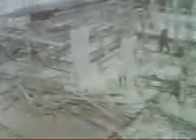approximately a few centimeters below, centering and form material lying around, one slab ready for pouring and being given final touch for the purpose of pouring. Concrete mobile pump taking position by adjusting the pump boom.

And its own body to cover the maximum area of the proposed pours without shifting the station if possible, but not necessary. Rock breaker machine excavating the rock area.

And you can see the site is looking a little untidy because scaffolding material is lying here and there. It should not be like that, but it was like that. And here you can see a pump, crane, some columns, and let's go to the other plate now.

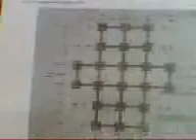It shows foundation level and slab level, just for the purpose of information, how practically it is done. It's just for the purpose of indication. I think it may be useful. Let's see another one. It's a different one, a little cross type. See the various columns on the grids, these various columns and beams and their spacing, 5 meters in general. There's no hard rule for that, but in general, consider that.

And then another one, it's the same but slab level. I have written certain notes, but they were typed in those times. There was no computer actually. It was manually done, so it is not that clear. In those days, I used to do everything manually, and it's all drawn by hand. Nothing was on the computer.

It's an inclined building with the grid, horizontally inclined, but L shape. The same type of methods for the purpose of references, and the slab again. You can see the same slab level. It may not be clear for the purpose of reference, but for the purpose of understanding, it can give an idea how the work is done in the field.

Now let's see another complicated one. You can see it's a little tedious. You see this shape of the building, the corner at one end, then another like that. It depends upon the architectural building, but the layout system is clearly shown, clearly indicated. I think you get it. Then let us see the slab location of that. The slab is simply a reflection of that one. If you see both, and let's go to the other one, a different shape.

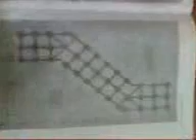And let's go now. You can see the same reflection on the slab, as typically I showed there. And it's another building complication now. Let's see. A Z diagram, we can say. It's completely different now. Of course it's complicated, but buildings happen to be like this. You can see the locations almost as usual.

Now, you see, this is the procedure of setting out. Nowadays, setting out is not that difficult, but understanding is a must. If you don't understand, it will cause a problem. And land surveyors will try you all the time. They will test you all the time. But you must know at least the basic principle, how it is done.

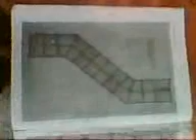Once you get the idea, it will be better for you. Now the coordinate system works, so coordinates are set on site. You can see the slab of that. This is the slab layout, also with a similar pattern as I told before.

Same type of notings, same type of grids. Here see the grids, 5 meters, and it is just an indication, it could be 6, it could be 5. Now I'll go to the other one, which is a formwork arrangement.

Let us see, there's a column here. This is the arrangement of formwork column in plan, the formwork arrangement of this column. You can see how I put it in the plan, how I reflected it.

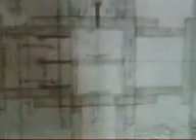Reflecting this, first of all you can see there's the ply here. Initial work is ply. This ply will really support the concrete, the touched concrete.

You see this hanging stone here from the top of the shutters, top of the column shutters. This is for checking verticality at 3 points, because this is about 3 to 4 meters high column, and it requires 3 locations for plumb checkup.

You can see all these members around. There is a frame, cross frame of timbers. There are vertical battens here. These are the vertical battens, you can see them very well.

Horizontal and vertical supports clearly give an idea of the complication of the arrangement that has to be done on site, for the purpose of resisting the horizontal forces as well as vertical forces, vertical thrust as well as horizontal thrust, meaning when concrete is liquid.

The shuttering has to behave to resist the liquid force, that is WH cube over 6, that is a moment, and WH square over... it acts actually, the resultant acts at 1/3 from the bottom of the shutters. At 1/3 the resultant force will be there, and there should be strong support which can resist the bending moment coming from the concrete when it is wet.

After getting dry, there will be no problem, so the design has to be done accordingly. It's a little complicated and direct formulas cannot be applied, but it's not that difficult as well.

Because it will take at least 1 hour or 2 hours, by that time it will be a little hard, it will set, and the pressure on the bottom portion will reduce. Pressure on the middle and top portion shall remain higher. Accordingly, supports are placed. You can see I put checking arrangement also.

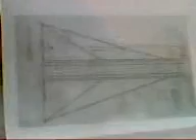Now let us see the full scale of this column forms, because I'm just zooming. These are column forms from top here.

It's very easy to see. Of course, it's not that in depth clear, but you can see yourself how the supports have been arranged and placed and pegged in at the bottom on both sides, on 4 sides actually, and more details are given in this that can help any engineer or any supervisor or any foreman to calculate the material required for the forms. You can see this plumb bob as well, and what all should be there.

In advance planning can be done, real planning. You can see this is the clamp arrangement here, how the clamps work. You can see this clamp here, cross clamps, steel clamps, cross clamps, wherever this clamp line is shown.